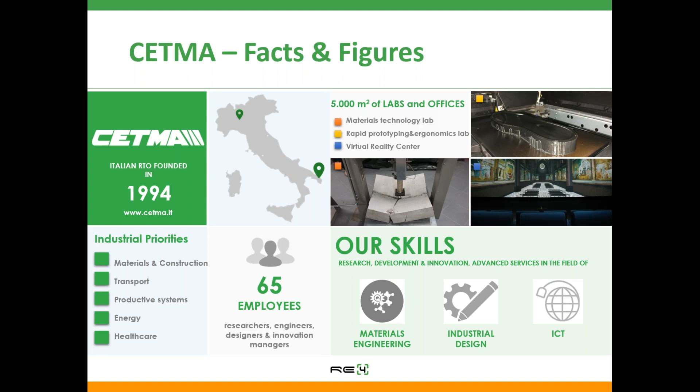Coming back to the RE4 project, it is a project of circular economy for the construction industry, which, according to the last available key figures from the European Construction Industry Federation, is one of the main drivers of the European economy, accounting for more or less 9% of European gross domestic product, with 101.1 billion euros of turnover and 6.4% of total employment. However, the construction industry is also responsible for the main waste stream at European level, the construction demolition waste, which accounts for approximately 800 million tonnes per year.

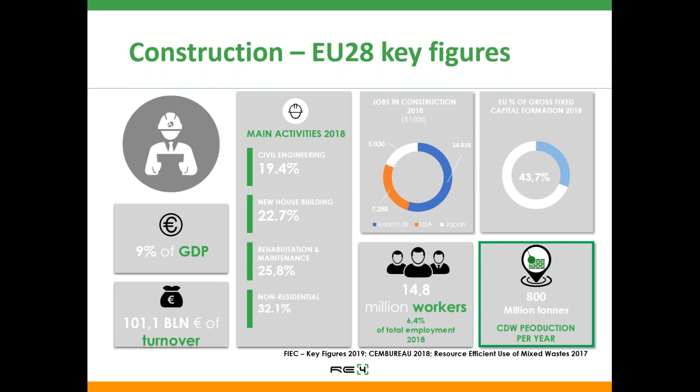The interesting point is that quite a lot of this construction demolition waste can be recycled in high-grade applications, but it is very often confined to low-grade applications or landfill. Moreover, there are other materials from construction demolition waste—wood, plastics, and glass—with very high recycling potential that is, however, unexploited.

In this scenario, Europe has set the challenge of developing energy-efficient building concepts using new or adapted prefabricated components, allowing the reuse and recycling of different materials and structures while reducing energy use and minimizing environmental impacts. Europe also set the target of a minimum share of recycled materials in the final product of at least 10 to 15%.

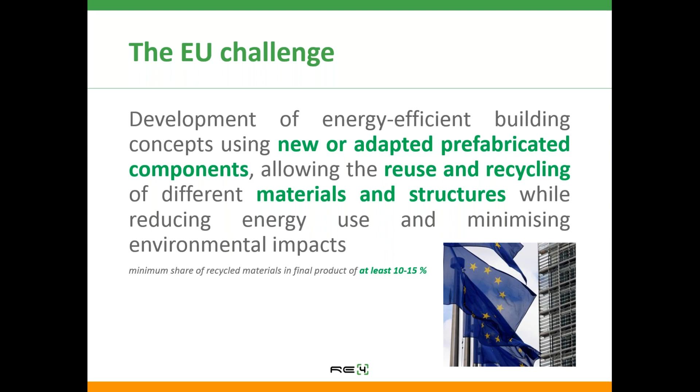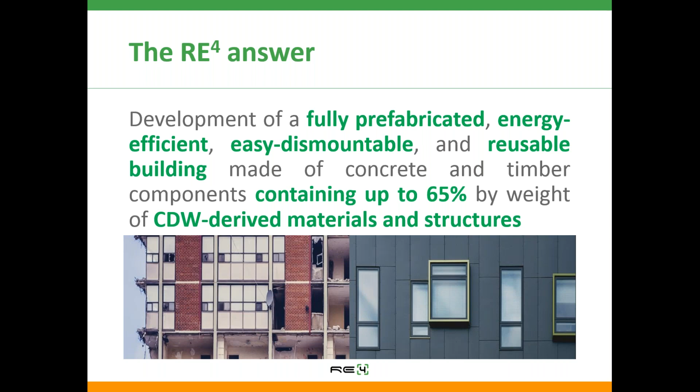This challenge was taken up by the RE4 project, which has developed a fully prefabricated, energy-efficient, easily dismountable, and reusable building made of concrete and timber components containing up to 65% by weight of CDW-derived materials and structures.

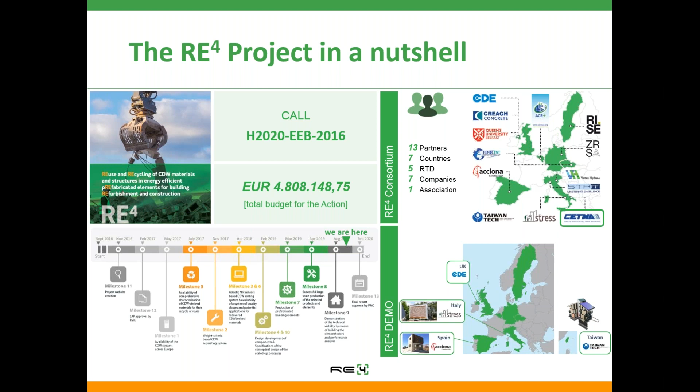To reach this goal, we gathered a multidisciplinary consortium coordinated by CETMA and made of 13 partners from 7 different countries across Europe and 1 non-EU country, comprising 5 universities and research centers, 7 industrial partners, and 1 association. The project has an overall budget of about 5 million euros. It started in September 2016 and will end in February 2020.

There are 4 main pillars supporting the project. The first 2 are technical and refer to the maximization of CDW recycling and reuse.

In terms of construction demolition waste recycling, RE4 has developed advanced CDW sorting technologies to improve the overall quality of CDW derived products, as one of the main constraints for growth is the quality not being good enough when compared to virgin sand.

At the same time, RE4 has also fully exploited the recycling potential of the lightweight fraction from construction demolition waste, which is currently unexploited when it comes to rigid plastics or wood and plastics.

This has been supported by the compliance assessment of each sorted fraction against relevant national and European specifications, with the definition of new quality classes for CDW-derived aggregates, aiming to support the development of a new standard in the field of construction demolition waste.

Finally, the construction demolition waste recycling potential has been verified with the development of RE4 materials and prefabricated elements incorporating high ratios of construction demolition waste derived materials.

RE4 aims to improve the state-of-the-art recycling rate from 80% to 95% and to improve resource efficiency in terms of virgin material replacement of at least 65%.

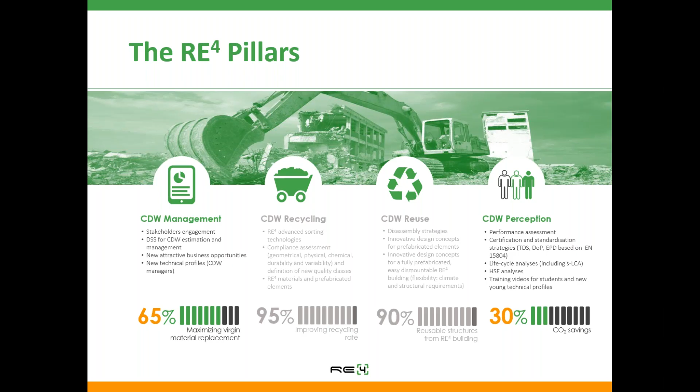Now let's see a brief overview of the main results obtained so far by the RE4 project. For each result, we have devoted specific presentations both today and in the forthcoming webinar session.

So, is it possible to build a fully recycled house? The RE4 project answered yes. Nevertheless, it is crucial to adopt a circular approach and to address all the main steps of the construction process.

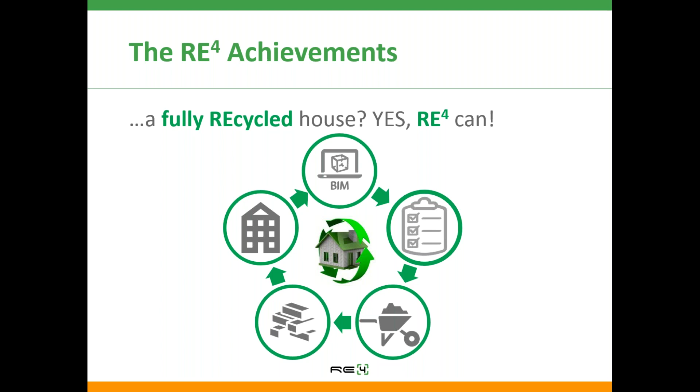That's why the RE4 project has developed a solution in terms of design for reusable buildings, construction strategies, CDW sorting, CDW quality assessment, development of materials and prefabricated components incorporating high ratios of construction demolition waste, and digital tools to support all the actors of the CDW management.

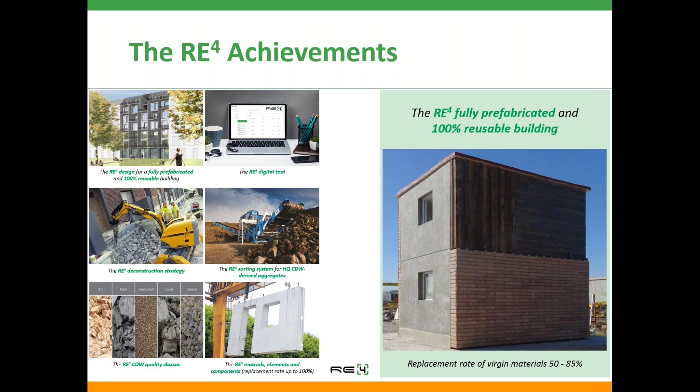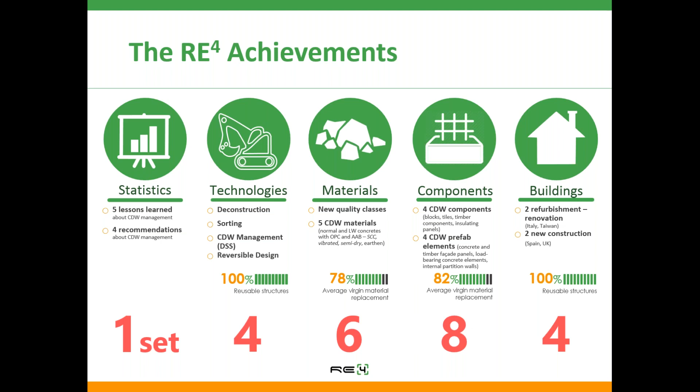In terms of figures, the RE4 project has developed one set of statistics, both lessons learned and recommendations in terms of CDW management, 4 new technologies in terms of deconstruction, sorting, design, and digital management, 6 new solutions at material level in terms of new quality classes for CDW derived aggregates, 5 new materials incorporating on average 78% of CDW, 8 new components, both structural and non-structural, incorporating on average 82% of CDW, and finally 4 demo buildings, 2 for new construction and 2 for renovation.

We have tried, and are trying, to share these results as much as possible, as we feel that the transition from a linear to a circular economy in construction has to be promoted at all levels of the CDW management value chain.

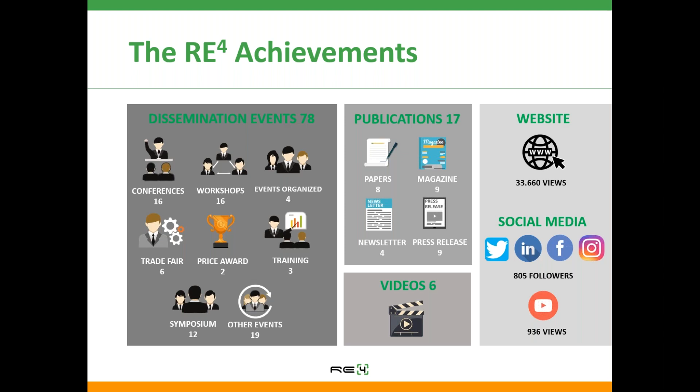In terms of impact, the European Commission set the goal of CO2 saving by 30%, energy saving by 20%, and a minimum share of recycled materials in the final product of at least 10 to 15%.

These are the results that we obtained with the RE4 project: CO2 saving more than 40%, energy saving more than 45%, and replacement of virgin material with CDW materials more than 50% on average.

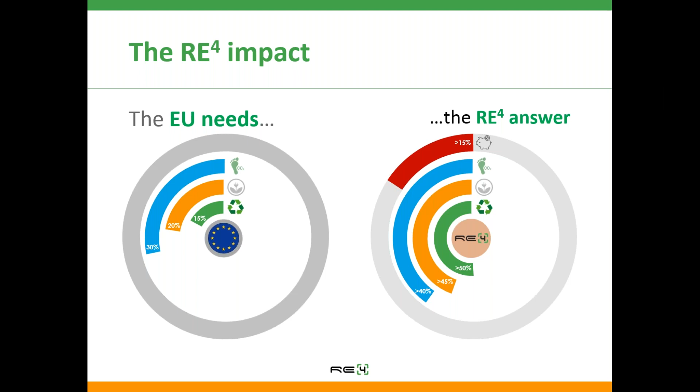We've also provided an additional economic impact, because the RE4 solution resulted in being more than 15% cheaper than conventional solutions. To conclude, the RE4 project has demonstrated how CDW-derived materials can be effectively reintroduced in the production cycles of concrete and timber components, with a replacement rate of 50 to 85%.

Moreover, from a technical point of view, a fully prefabricated, 100% reusable building is now a reality. The way is paved, but there is still a strong need for improved waste identification, separation, collection, source and quality assessment procedures, and mainly policy and framework conditions that can foster the transition to a circular economy in construction. Thank you very much.

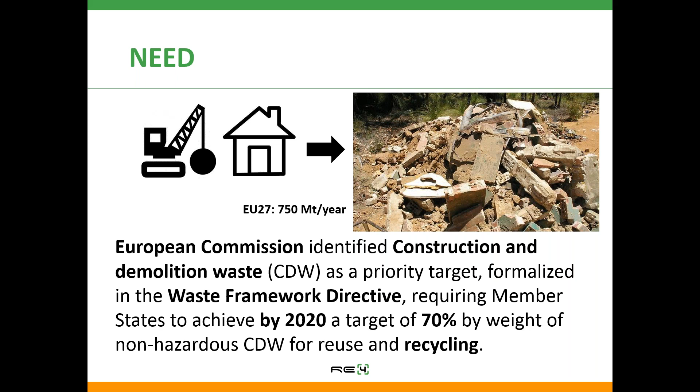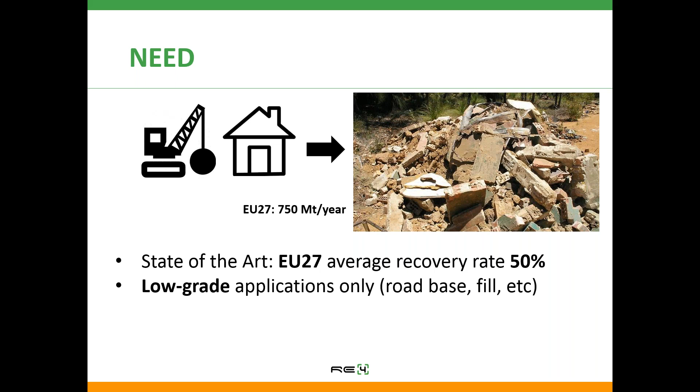At the time of starting the project, the situation was a little different, and the average recovery rate for member states in Europe was around 50%. The main issue was that these materials were recovered and reused only for low-grade applications, such as road bases, for example.

Then the development of this robotic sorting system defined 3 different objectives in line with the objectives of the project. The first one is contributing to define, together with the other technologies developed within RE4, a complete circular management system for CDW, to design a process from the demolition of buildings up to the construction of new ones.

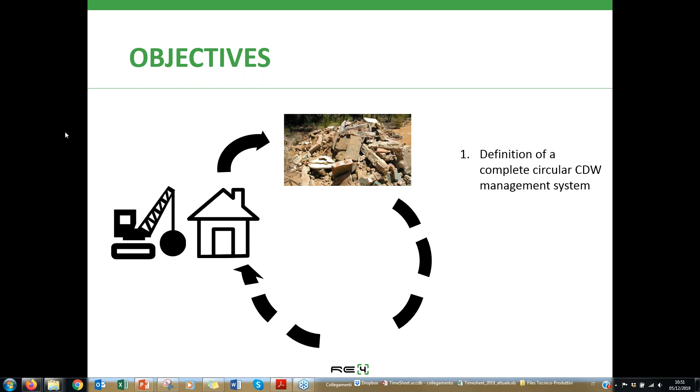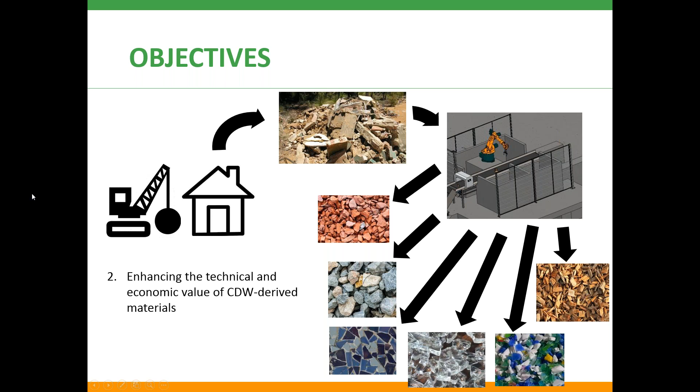The second one, more focused on robotics sorting systems, is the enhancement of the technical and economical value of secondary raw material derived from CDW compared with the state of the art of technologies. The third one is giving these secondary raw materials a new life designed within the project.

For example, a new life talking about high-grade applications such as structural concrete or geopolymer binders and insulating prefabricated panels, according to the different classes of materials that can be sorted by the systems.

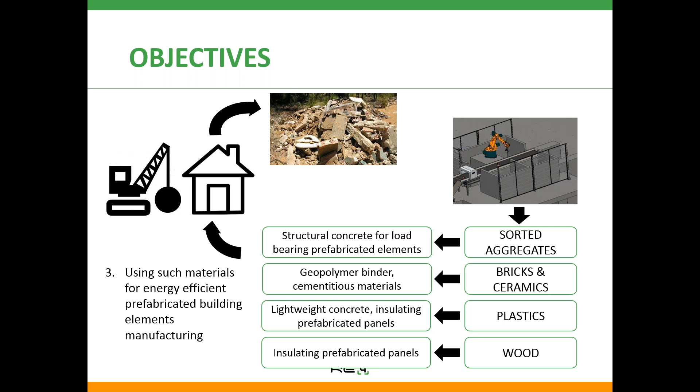STAM was allowed to accept the challenge of this research activity thanks to some background expertise. The main one is the expertise in designing and integrating complex robotics and mechatronic systems, coupled with knowledge in software development, in particular for image acquisition, image processing, three-dimensional image processing, and the development of recognition and classification algorithms.

This expertise was previously applied to another sorting system for the toys industry, where we developed a robotic line to separate different items in an automatic way according to the different shapes that were automatically detected.

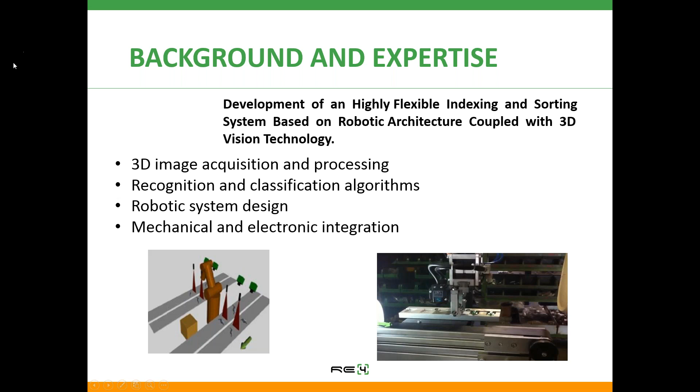The first activity within this task of the project was the definition of the functional and technical specifications for the sorting system. Some were qualitative, such as the list of materials to be classified, identified as bricks, stones, and mineral aggregates, ceramics, glass, plastics, and wood, and the working mode for the system, which had to be fully automatic.

Some of the specifications were quantitative, such as the pick rate, aimed at reaching 100 picks per minute, the minimum payload of the mechatronic part, the maximum contamination by weight of each single class, around 5%, and a productivity of at least 100 kilograms per hour.

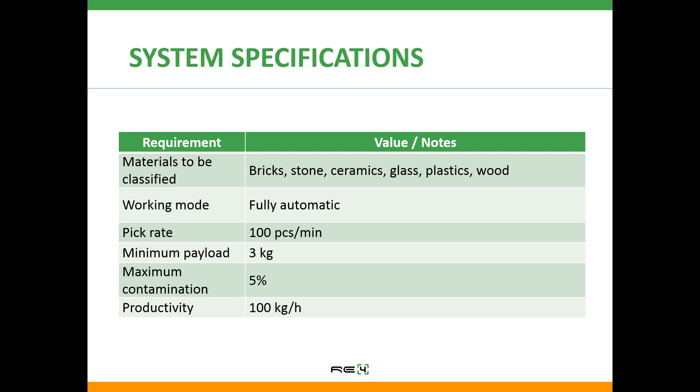After defining these specifications, we went to the definition of a layout for the system together with the design concept. You can see in the upper side of this slide the top view of the layout. On the right part of this top view, there is the inlet side of the material.

The concept is composed of a conveyor belt on which the CDW fragments can flow and are analyzed by the first system they encounter, which is the vision system and sensing system of the robotic cell. This sensing part is composed of a hyperspectral camera which scans line by line and pixel by pixel the belt flowing under it, aided by a suitable illumination unit emitting a certain power of light in the near infrared range.

The sensing system gives the raw data, the raw signals, to the processing unit, which is composed of an industrial PC on which the software modules run, and which has three main tasks. The first is acquiring and processing the hyperspectral images. The second is classifying the information in real time and classifying the detected fragments upon the conveyor belt. The third is giving commands to the mechatronic part.

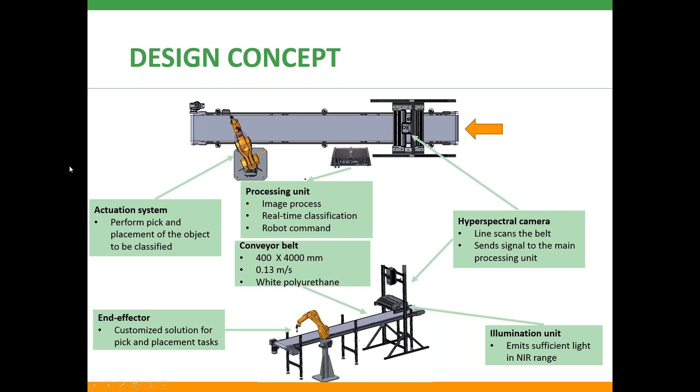Here we can see a scheme of the software architecture of the system. This architecture was developed in ROS, Robot Operating System environment, and is composed of different nodes, which are represented by the ellipses in the slide.

The first node, according to the data flow, is the camera gate, which was developed by the camera software development kit, and which produces the raw data in the form of data cubes. Each single data cube represents a frame of the conveyor belt, so an image like the normal RGB images we all know, but with the difference of the number of channels. An RGB image has three channels; our images have 252 channels, or different wavelengths.

These data cubes are passed to the image processor node, which cooperates together with the classifier node. The image processor detects and analyzes the geometrical information by doing a segmentation of the frame, detecting the CDW fragments within the image and calculating their center of gravity.

Moreover, it communicates together with the classifier. The classifier loads the classification rules from the database and extracts the most important features of the pixels, which are given to it by the image processor, and does the real-time classification of the pixels. So it gives to each pixel, each single CDW fragment, a label corresponding to the material class it's supposed to belong to. The image processor, after the label assignments, publishes the geometrical targets to be given to the mechatronic part.

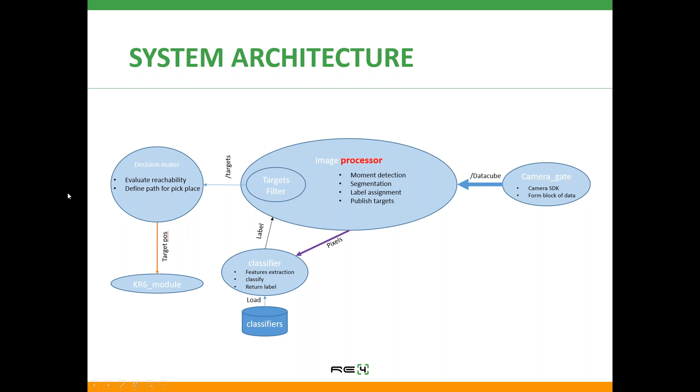We can see now in a little bit more detail the image processor node. In the upper part of this slide, we can see a grayscale image and a color image. The first thing the image processor does is select one layer, one channel, of the data cube I was mentioning before, and uses this sort of grayscale image to do the segmentation of the frame and to detect the fragments on the conveyor belt.

After doing this, it calculates the center of gravity of each single fragment, represented by the colored bullets in the right part of the picture, and identifies around the pixel of the center of gravity a window of reliable pixels which are passed to the classifier. The classifier will make these pixels, which are 10 pixels, carry out a votation to define which is the most voted material class to be assigned as a label to the fragment.

Finally, the image processor tracks the objects in the frame according to their position and to the speed of the conveyor belt, for the later pick and place operation by the mechatronic part.

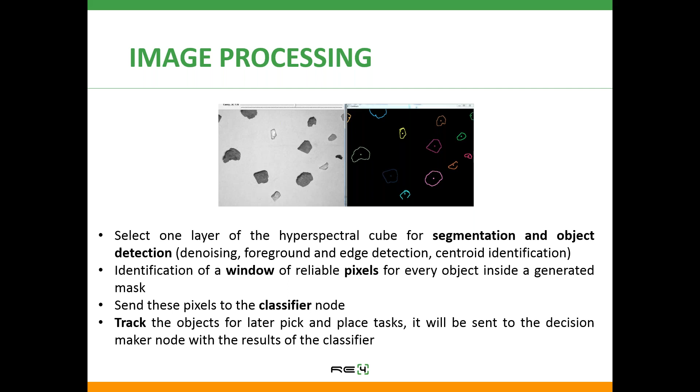The other most important node of the software architecture is the classifier, which uses the raw data. In the lower left part of this slide, we can see how the raw data can be represented. For each pixel which is analyzed, we can see a line graph representing the wavelength signature of the pixel. As we can see, different materials can be characterized by quite different shapes of these wavelength signatures.

And the aim of the classifier is finding a formal mode, a mathematical modality to identify these shapes. The first operation that we did by developing the classification model was to reduce the dimensionality of the problem. The problem was at its beginning a 252 dimensions problem, one for each wavelength represented in the data cube, the raw data, and this would be too heavy a problem from a computational point of view for normal hardware.

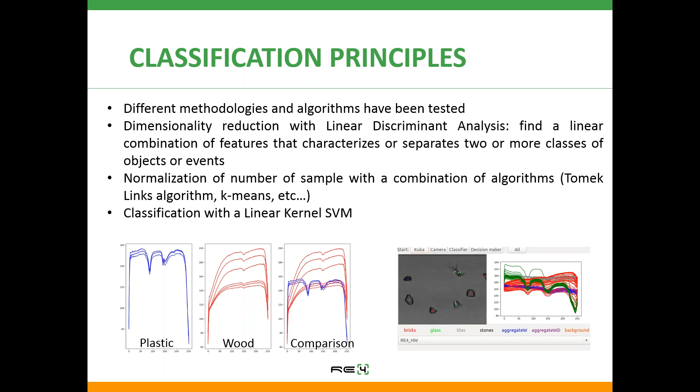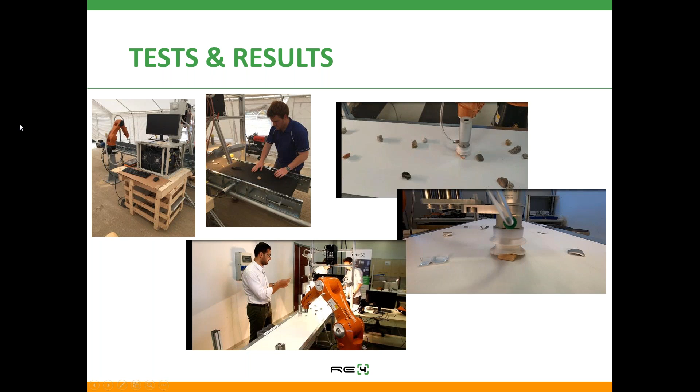After this development part, we went through quite a long test campaign, two different test campaigns actually. One is represented by the pictures you can see in the right part of the slide, tests done at lab scale. And the other one, you can see in the left part, was done in a relevant industrial environment hosted by our partner CDE, where the system faced real industrial problems such as the presence of dust, noise, vibrations, humidity, and so on. And in both test campaigns, we were able to underline quite encouraging results.

Basically, at the end we developed two different classifiers. The first one dealing with the heavyweight materials: brick, stones, mineral aggregates, ceramics, and glass. The second one working with lightweight materials such as plastics and wood. And we reached a productivity of around 800 kilograms per hour, with a classification error and pick and place error which are very low, around 1%. So even better than what was requested by our starting specifications.

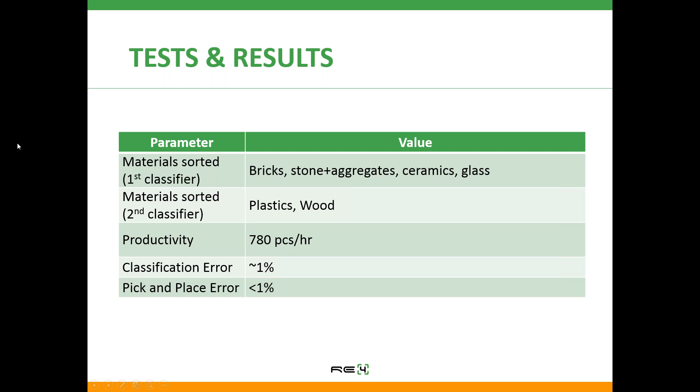A few words about the future possible developments of this system. We can, of course, still improve the proof of concept that we have developed. For example, by testing the system and integrating into the software architecture different methods than the support vector machine, for example neural networks and convolutional neural networks, which are widely used in both research and industry for image processing, object detection and pattern recognition problems with normal images, grayscale and RGB images, and we can test if they work well even with hyperspectral images.

The second activity that can be done deals with the industrial upscaling of the sorting system by giving it a more industrial look, by integrating more industrial elements, PLC, safety measures, human-machine interface, and so on. And by increasing the performance of the system in terms of productivity, for example by integrating multiple pick and place operations, multiple robots on the same line, and so on.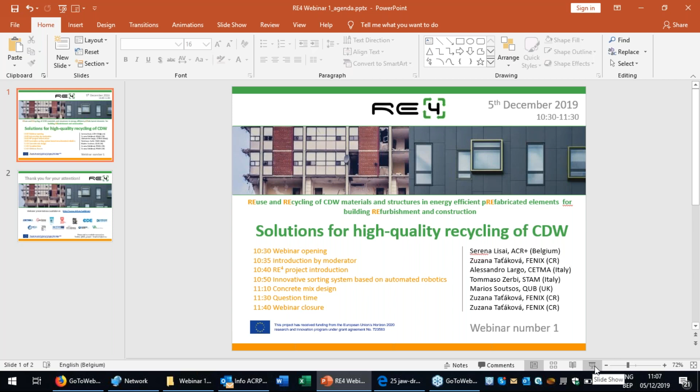Our final presentation will be on the topic of concrete mix design, and it will be presented by Marios Soutsos. He's a professor of structural materials at the School of the Natural and Built Environment at Queen's University Belfast. So, Marios, the floor is yours.

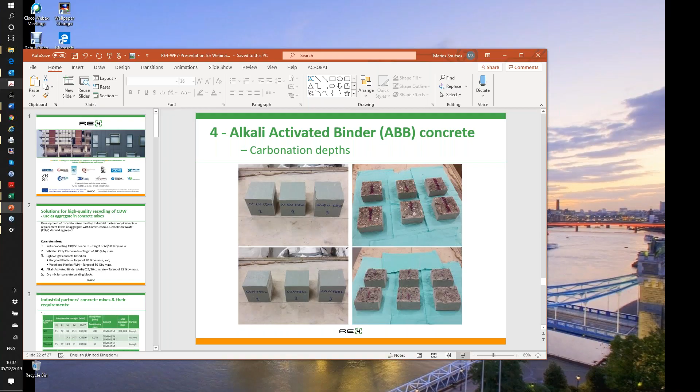Thank you, Zuzana. Can you hear me? Hello, can you hear me? Yes, we can. You can start. Okay.

That's lovely. Okay, my name is Marios Soutsos. I'm a professor of structures at Queen's University Belfast, and we are one of the many partners for the RE4 project. So I'll be presenting the use of construction and demolition waste derived aggregates in concrete mixes.

So when the project started, we approached our industrial partners to see what their requirements were, what concrete mixes they were using, to see how we could achieve high replacement levels of the virgin, newly quarried aggregates with construction and demolition waste derived aggregates. The industrial partners were using different types of concrete mixes and different materials. So the presentation is structured around these different types of concretes, listed here: self-compacting C40-50 concrete, vibrated C25-30 concrete, lightweight concrete, which we try to achieve using recycled plastics, and wood-plastic mixtures.

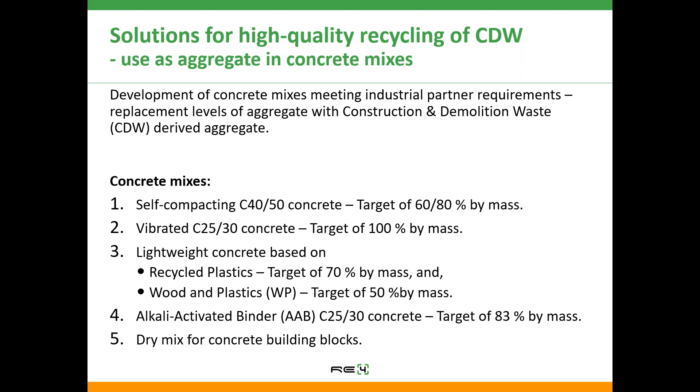We also did cementless concrete, which is alkali activated binder concrete, which is a C25-30. And finally, we looked into concrete building blocks that require a dry mix of concrete. So I'll be going through each one of these in my presentation.

So in terms of the concrete mixes from the industrial partners, you can see that there is the self-compacting concrete with 28 days strength complying with the C40-50. You've also got the cement type that is being used. So some like the SCC and some others were using rapid hardening, while others were using normal hardening cement.

We've got a vibrated concrete, two strength grades, C25-30 and the C32-40. So where these original mixes came from is listed on the right-hand column of the table. So some of the mixes came from Creagh in Northern Ireland, and some came from Acciona in Spain.

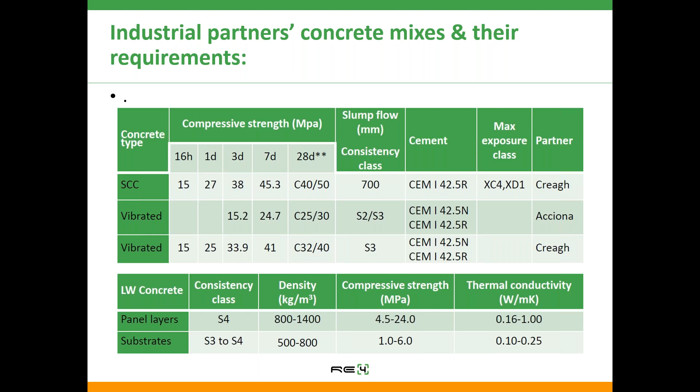We also produced lightweight concrete, as I said, with plastics or a mixture of wood and plastic, and that was aiming to have a low density and a good thermal conductivity. The strength requirements for these lightweight concretes were low.

So construction and demolition waste is an inert fraction, and it has to be processed before it can be used as aggregate. So the mineral fraction was sorted into fine aggregate, 0 to 2 millimeter, and then two sizes of coarse aggregate, 2 to 8 millimeters and 8 to 16 millimeters. They were used for self-compacting concretes and vibrated concretes.

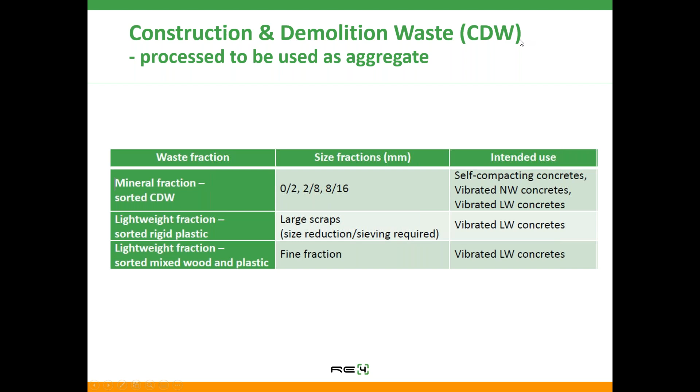The lightweight fraction was the rigid plastic that required sieving because of the large particles, and we also used mixed wood and plastic as fine fraction. So a few pictures showing the aggregates, the fine aggregates, 0 to 2 millimeter, the 2 to 8 millimeter, and the 8 to 16 millimeter.

What one can see from these pictures is that the aggregate we have is a mixture of masonry, the red particles, and then we've got the aggregates as well as aggregates covered with cement paste. But because of the separation plants that are being used, developed by CDE Global, the aggregate is relatively clean.

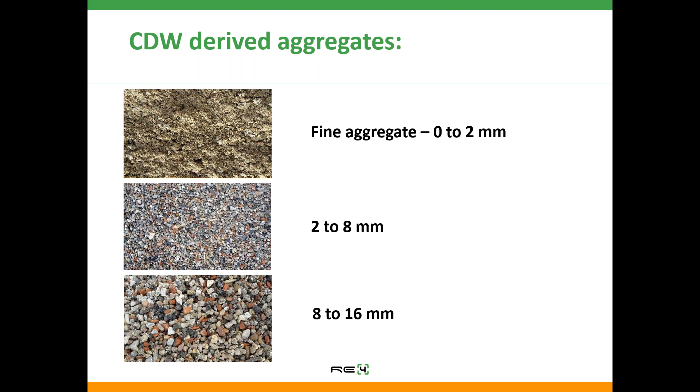In terms of wood and plastic, you can see that in the top picture. In the rigid plastic, you can see large particles. And as I said, these had to be sieved in order to get the size of aggregate that we required for the lightweight aggregate concrete.

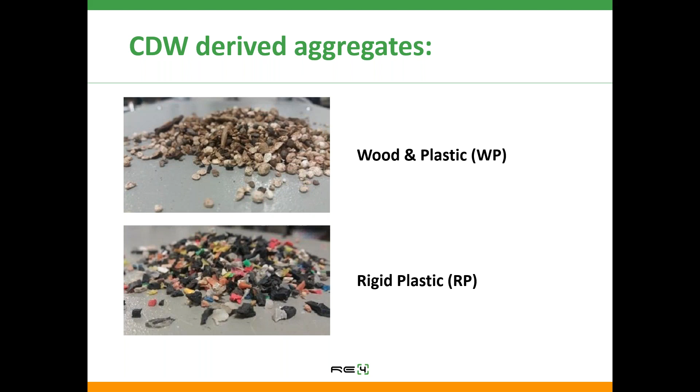So there is a reduction from using recycled aggregates. If you use both coarse and fine, the reduction is bigger than if you use only coarse aggregate. But all of these initial tests were labor intensive, and there were about 22 different mixes that were trialed.

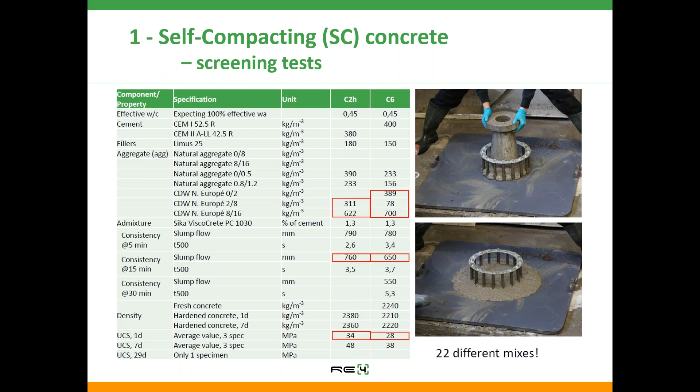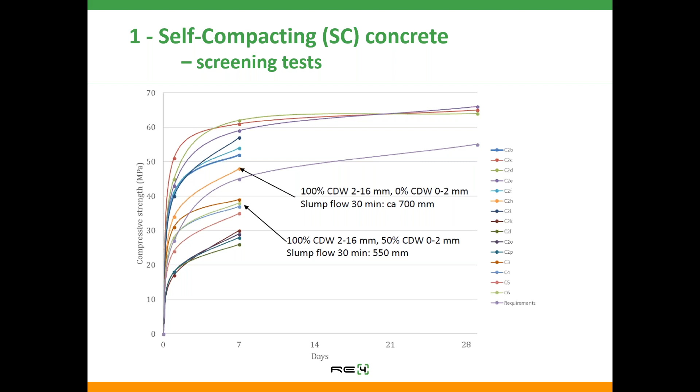Compressive strengths we obtained, as I said, there was an early age requirement at 16 hours because Crea Concrete is using it for precast work, and 16 hours is when the structural elements are lifted off the heated bed. So there was a requirement of 15 megapascal at 16 hours, and this was achieved easily. 28-day strengths of 48 megapascal were being achieved.

So some slight modification was needed to this mix to increase the cement content, increase the SP, to increase the strength further.

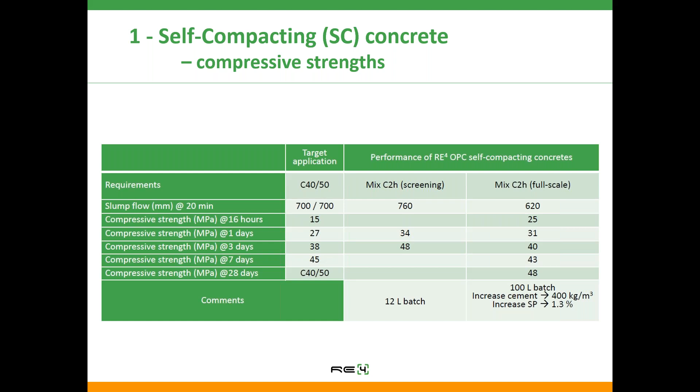Mechanical and durability properties of all the concretes developed have been determined to ensure that they are compliant with all the relevant standards. So the table shows the drying shrinkage of the concretes, the flexural strength, the modulus of elasticity. Chloride migration tests were carried out, as well as freeze-thaw resistance in presence of de-icing salts. So the full range of certification tests were done.

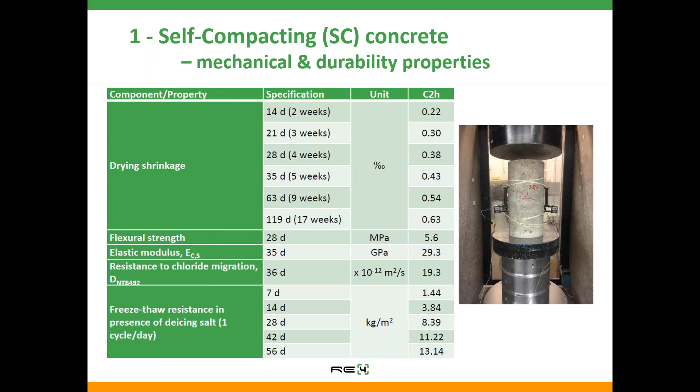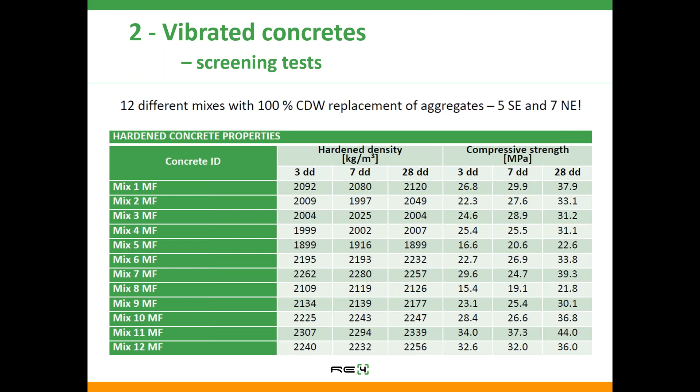So moving on to the second type of concrete, which is the vibrated concrete. Again, some initial screening tests were done with 100% replacement with recycled demolition aggregates. So compressive strengths that were achieved varied from very low, 20, to over 44 megapascal. Hardened densities are affected if you have masonry particles in the recycled aggregates, so strengths and densities are related.

So from those screening tests, selected mixes were done in large batches. So we've got the consistency classes S3, S2, and the mix 10 as S2 class. Strengths at 3 days are over 28, and strengths at 28 days, especially with the second trial, we have achieved 50 megapascal concrete, which was suitable for the C25/30 class concrete we are aiming for, but also for higher strength classes C32/40 and C40/50.

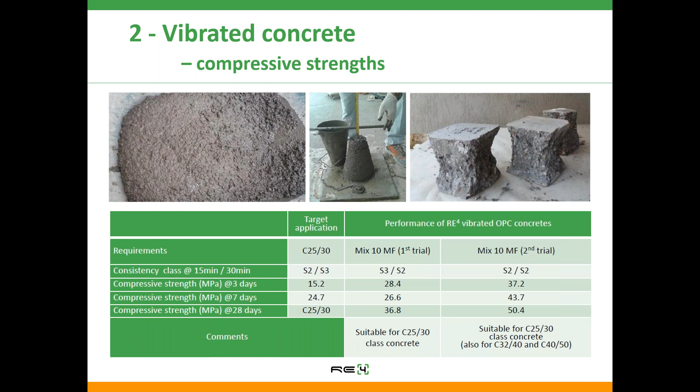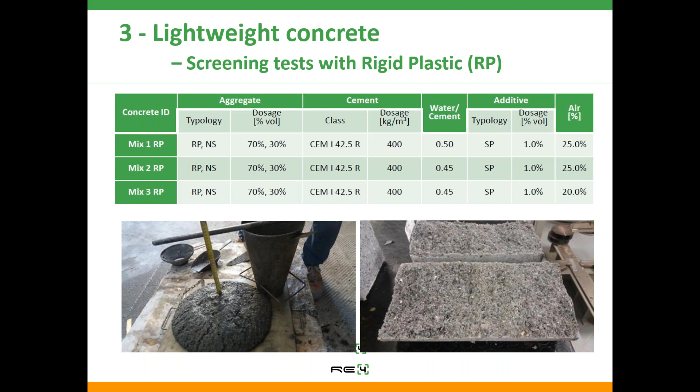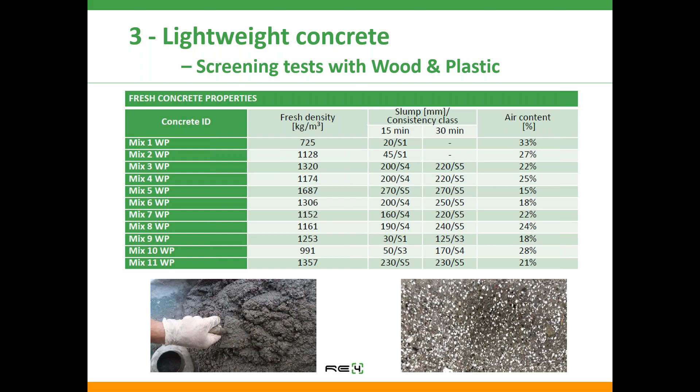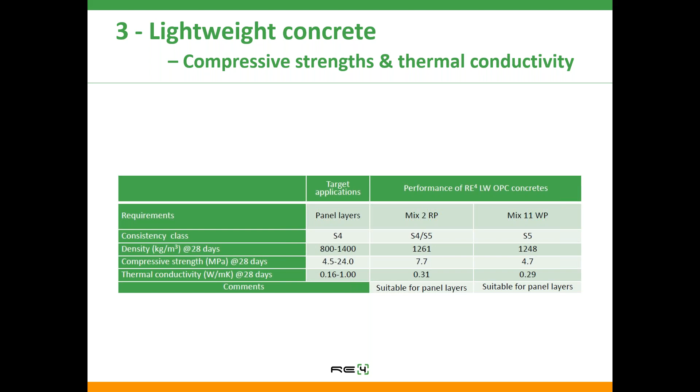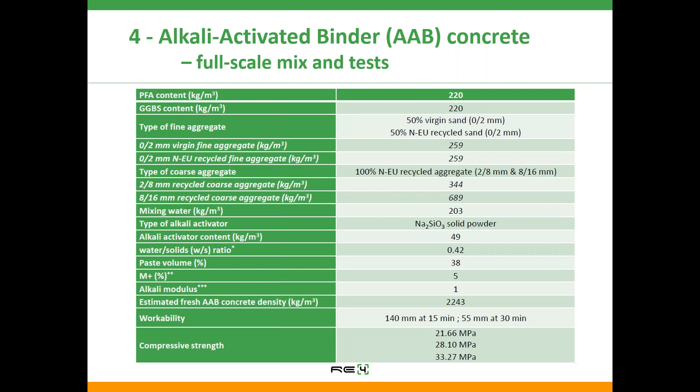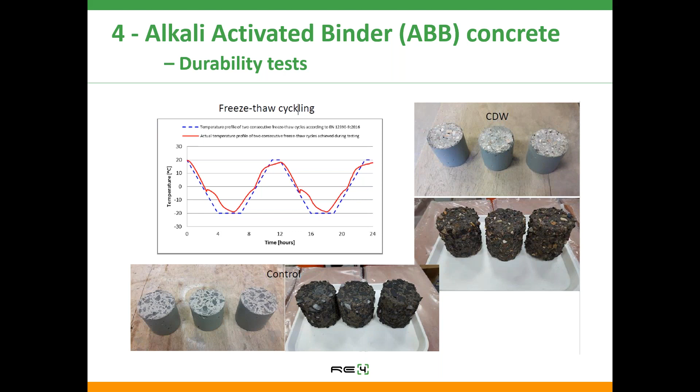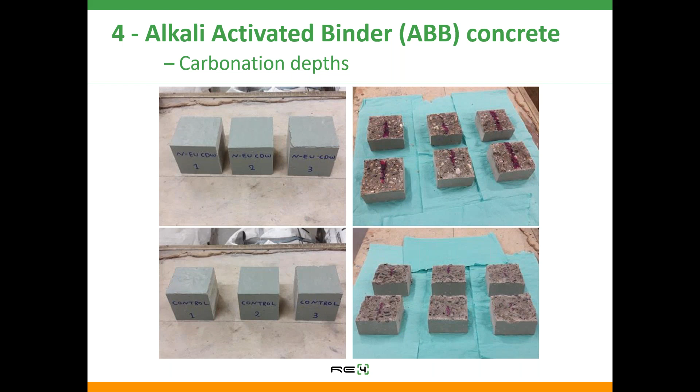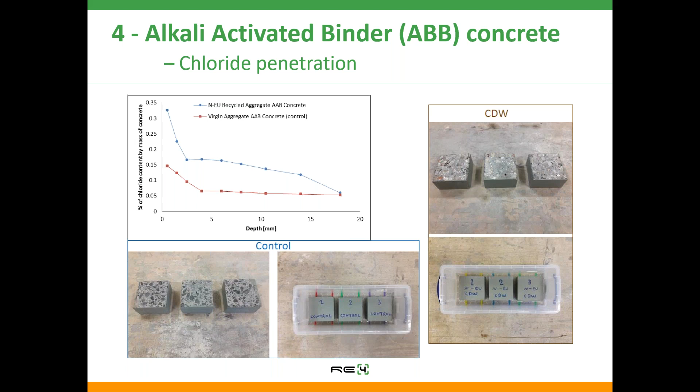Again, with the alkali activated binder concretes, all the necessary durability tests were performed. This one is showing the freeze-thaw cycling, and it shows the specimens that are degrading after the freeze-thaw cycles. The other one was carbonation depths. So at the top, we've got the recycled aggregate concrete, and this was compared with the control mix, which was with the newly quarried aggregates, shown at the bottom. As well as carbonation, we've done chloride penetration, and as you can see, the virgin aggregate had slightly lower chloride contents by mass of concrete than the recycled aggregate alkali activated binder concrete.

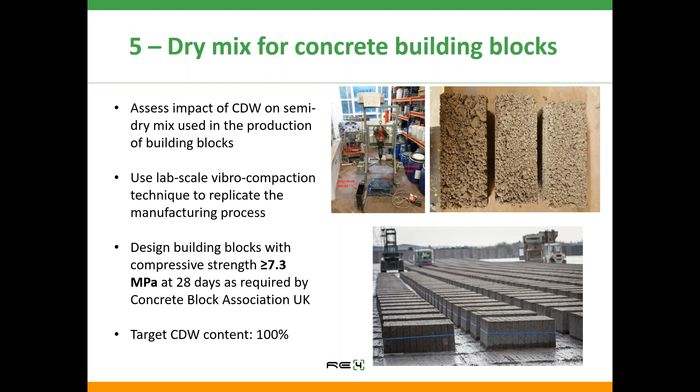The bottom picture on the right shows the equipment, machines used in Northern Ireland. They are what we call egg layers. They are not static machines, they are moving machines. So upscale factory trials were performed. So from the experiments done, initial tests with 50% level of replacement of newly quarried aggregates with recycled aggregates, the 7.3 megapascal compressive strength was achieved easily, but when we went to 100% replacement, the strength dropped to below 7.3 megapascal. So to achieve higher strength, we experimented with increasing the cement content from 119 kilograms per cubic meter to 153 kilograms per cubic meter.

We looked at the void content. Building blocks are not fully compacted. 19% is air. So we tried to reduce the void content from 19% to 15% and 11%. And by reducing the void content, the air, and increasing the density, the strength increased. We do understand that this is not the favored option for the building block producers. They do not want the density or the void content of their building blocks increased.

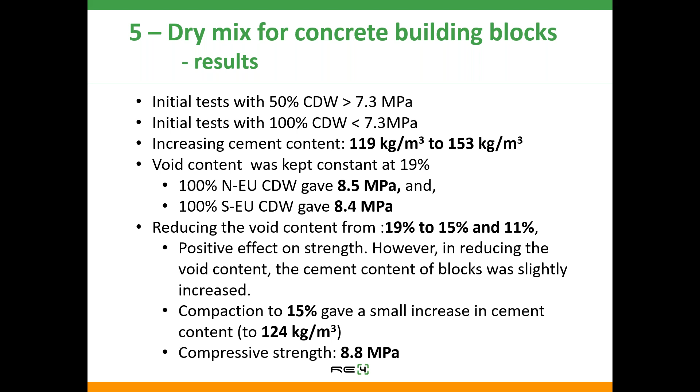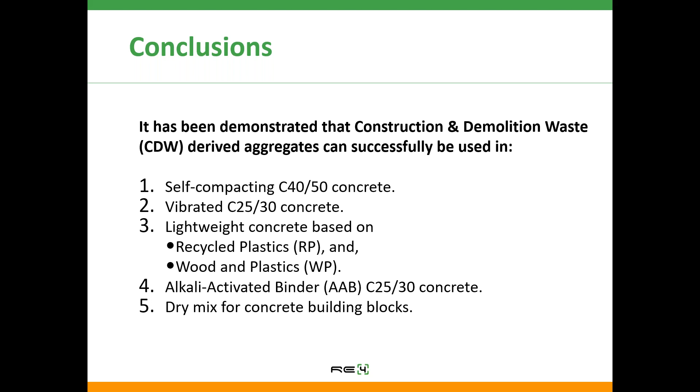So these are the different types of concretes that we've investigated, and as part of the project, it has been demonstrated that construction and demolition waste derived aggregates can successfully be used in lots of different types of concretes, which are listed in the slide: self-compacting, vibrated, lightweight concrete using plastics and wood and plastic mixtures. They can be used in alkali activated binder concretes, and they can be used in dry mix concretes used for building blocks.